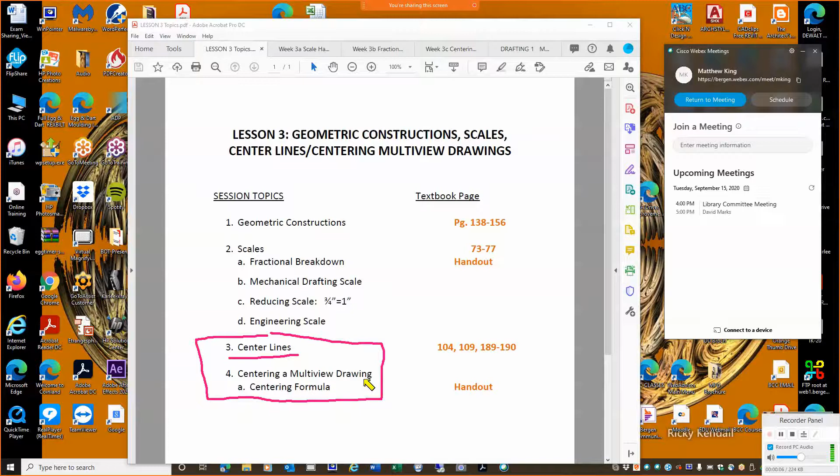Okay, so let's pick it up by going back to the drawing board. I have this drawing, a new drawing that I put here, and I want you to create the same thing. I simply started out with a rectangle of any size, and then I projected this upwards, and I drew a circle, and then I drew a box around it.

Okay, so it doesn't have to be of any size or exactly like this, just get it as close as you can. I would pause the recording until you get that done, and then resume. Okay, so I'm gonna pick it up, assuming that you've done that, and we'll move forward from there. All right, so center lines.

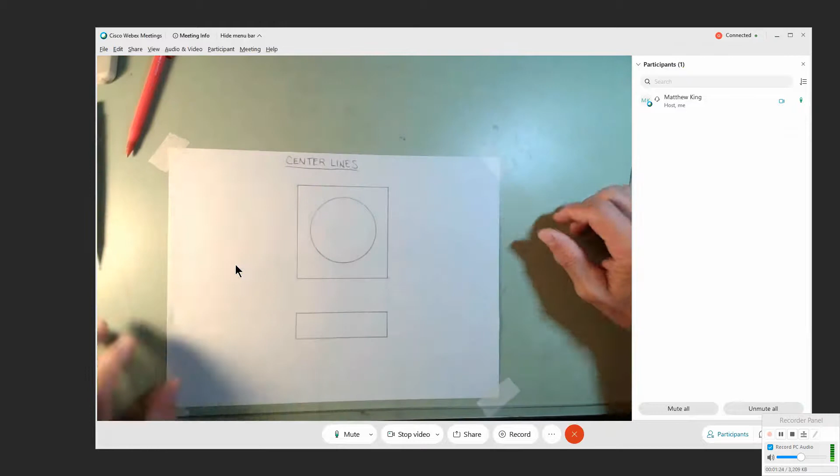Center lines have some theory that we have to talk about first. I'm going to go to page 109 in the book, and last week we saw this area for hidden lines, and now we're talking about center lines. So there's a couple of paragraphs that I want you to read, pointing out information in figure 4-28, which is down at the bottom here.

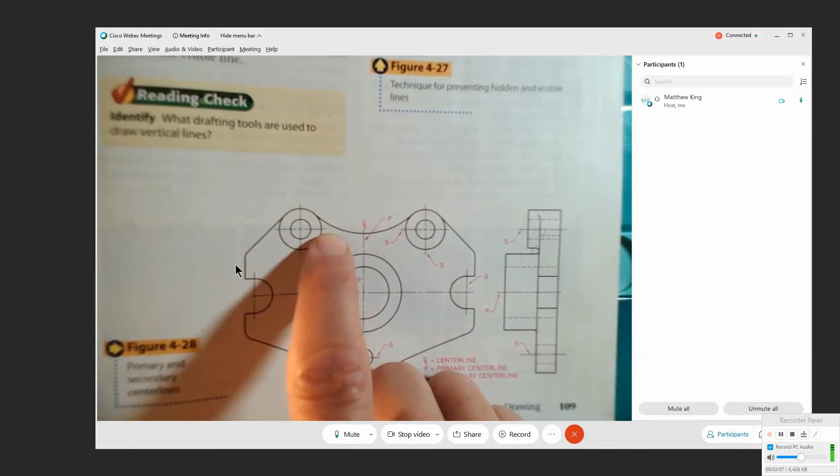So taking just a quick glance here, you've got a center line that looks like this as you're looking through the hole. Notice there's that little inner cross followed by a gap, and then the line goes out and goes past the edge of the circle. That's going to happen in all cases. So you have the center line that looks like that when you're looking through the hole or the opening, and then you have a center line when you're looking at it from a side view.

And if you look carefully, that's kind of just the horizontal piece of this, right? Long, short, long, long, short, long. They officially refer to that as primary center lines and secondary center lines, but that's not something I need you to get too crazy with. What is important is every view that involves a circle must now have center lines, and you need to draw them in there. So that's what we have to learn.

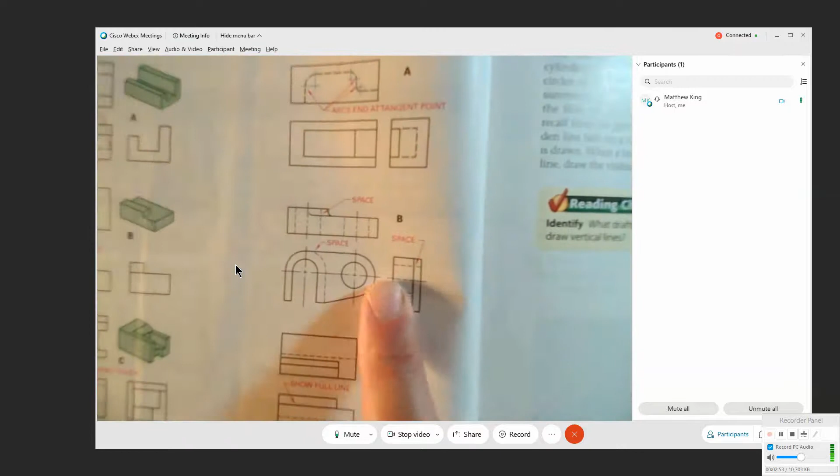If I take you to this example here on the previous page, you can see the front view, you have half a circle here, so that requires a center line. You've got a hole there and an outer arc, so these center lines have to go out past that. In the top view, it shows as the hole going up and down here. In the right side view, the hole goes that way. So they call that the axis direction of the hole. The hole is going through in that direction, so that's where you have only the horizontal one.

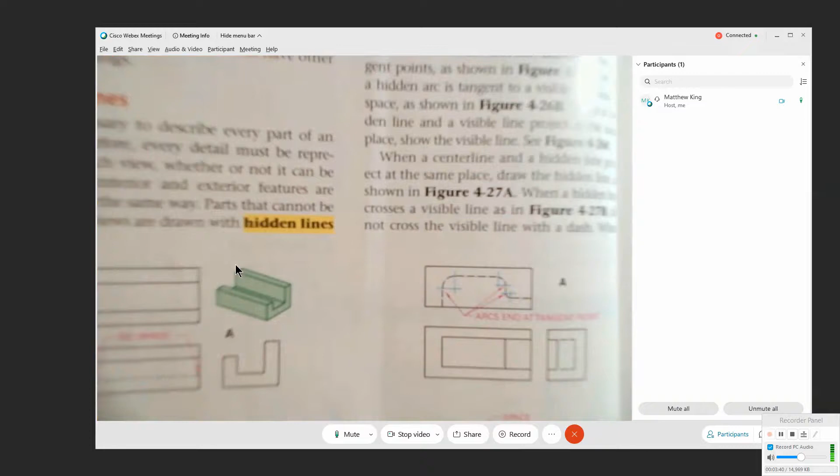In the top view, the hole is going through the part in that direction, so that's why you have the center line that way. Different shapes will require the same strategy of center lines. All right, so we got this here. I'm going to start by drawing the center line in the front view. Well, let me rephrase it. I'm going to draw the center line in the view that it shows as a hole.

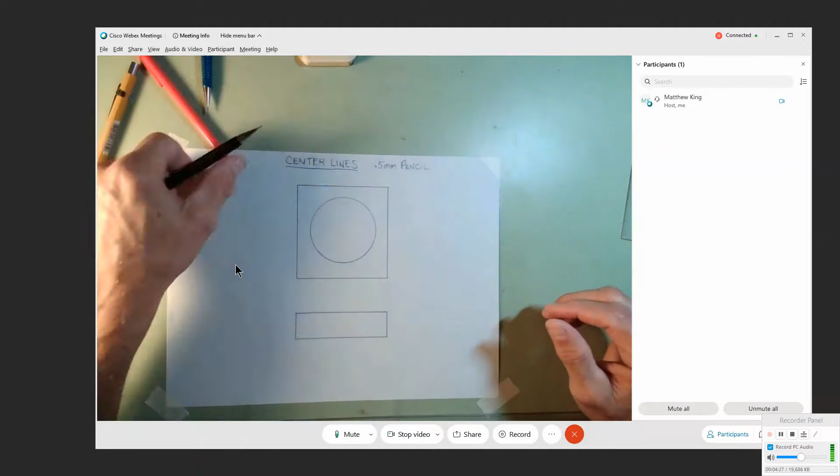Before we do that, we need to know that when you draw center lines, that's using your 0.7 millimeter pencil. I am wrong on that. 0.5 millimeter pencil. 0.7 is for hidden lines, forgive me. So 0.5 millimeter pencil. Now center lines are just symbols. They're not actually physically part of the object. Because it's a symbol, it's got to be thinner. And this is where your line weights really have to start showing. So your object lines must look darker and heavier than your center line.

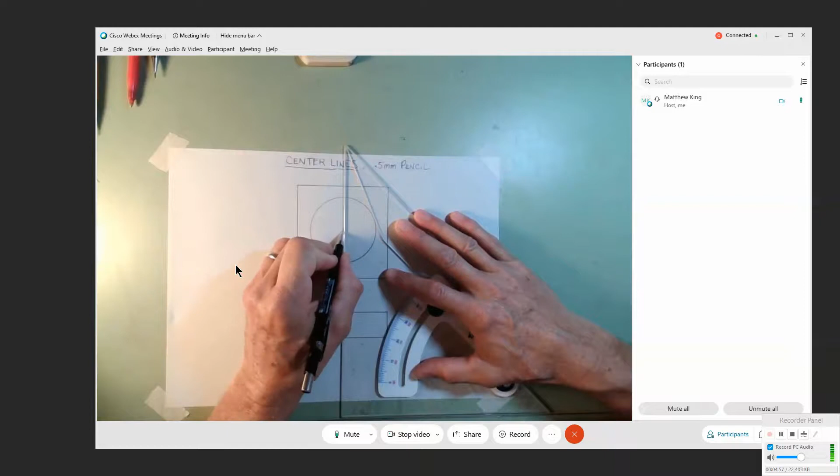Now, I'm going to draw it in this top view here, looking down through the hole, and I want you to just watch me, and then I'll dissect it when I'm done. So remember, we have that inner cross at the center. And you'll know where the center is because that's where your compass mark is. So it's like going over a pothole when you draw that. You dip down into that little compass hole that you'll feel with your pencil.

So you want that nice balanced cross at the middle here. And now we leave a gap and we draw out past the edge of the circle in all directions. And I'll back up and tell you what all of that amount is here.

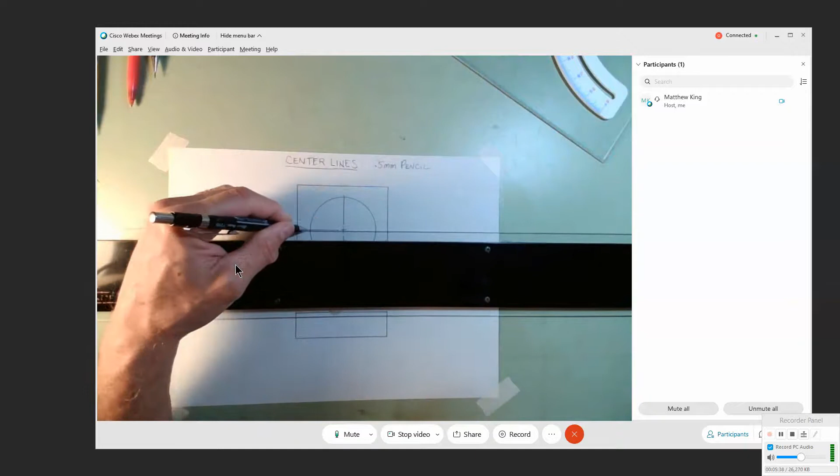Got a little close on this one on the left, so I'm going to clean that up because I want to do this just right. There we go. All right, so I'm going to draw these rules in red pen, so that you have this standing out here.

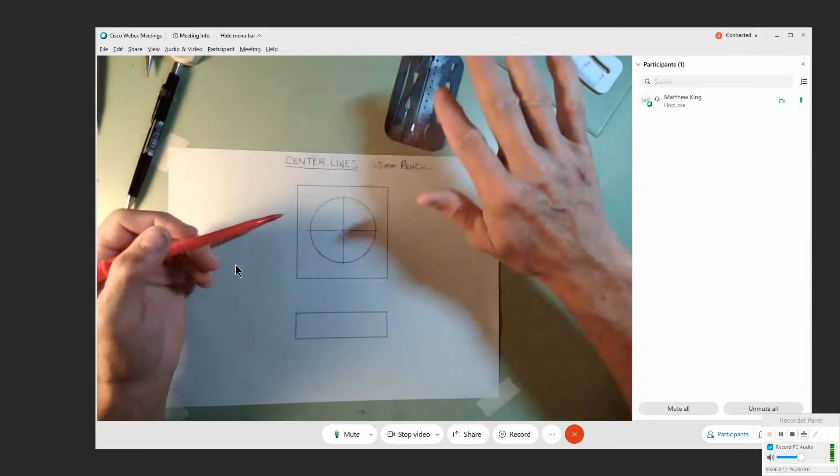So this inner cross of the center mark, that is 1/8 of an inch. Right, so that should sound familiar. 1/8 of an inch is what we draw with our dashes on a hidden line. The space, the gap, after that is 1/16 of an inch. So just like the hidden line, you got 1/8 inch dashes and 1/16 inch gaps.

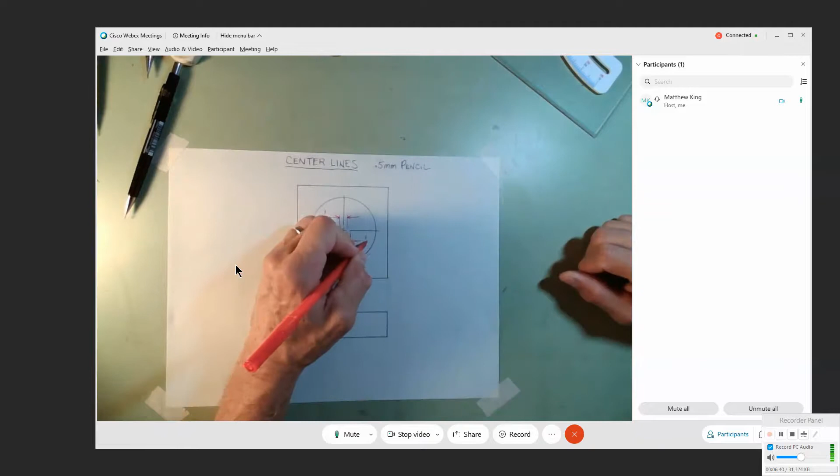Unlike a hidden line, remember with hidden lines you have that little plus or minus symbol to say it can vary based on the conditions. There is no plus or minus here. That inner cross has to be exactly 1/8 at all times, and the gap exactly 1/16.

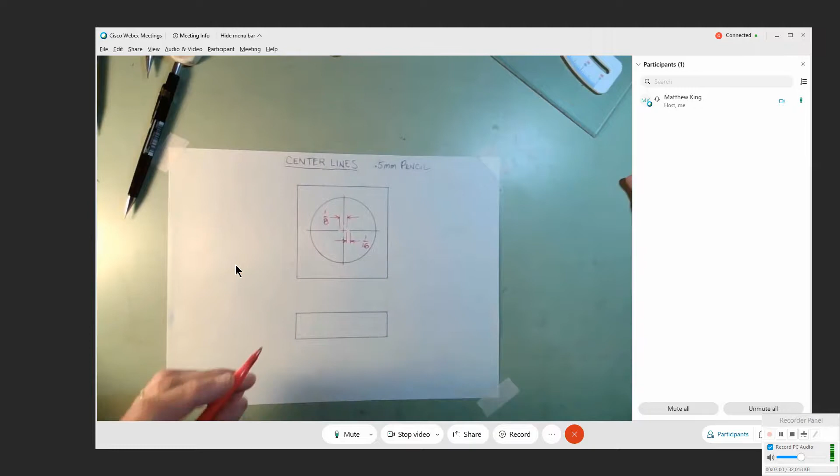Then we go out and we draw past the edge of the circle by 1/16 of an inch. And that too is an always, always. Okay, so in all conditions, on all sides of the circle, you are drawing out past it by 1/16 of an inch.

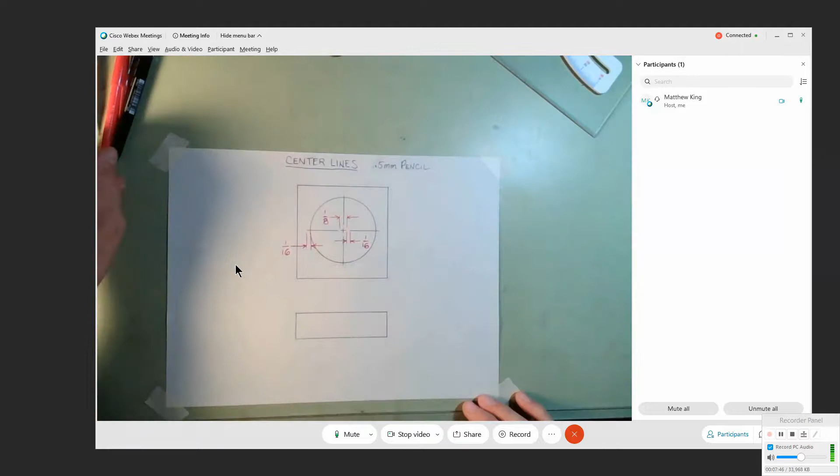So anytime you're looking down into the hole and you're seeing the circle of the compass, your center mark must look like that. Now in the front view, I haven't even drawn the hole yet, and I wanted you to see how I do that. So that's going to show as hidden lines, and that's where I'm thinking 0.7.

So I have to line up with my straight edge the outer edge of the hole, the 3 o'clock tangency, right? And I project down lightly, and then I draw my hidden line in my front view from top to bottom. And I repeat that on the left side. I line up my 9 o'clock spot, I project down, and then I draw my hidden line from top all the way to the bottom. Remember, you don't start or finish with a gap, that 16th inch gap.

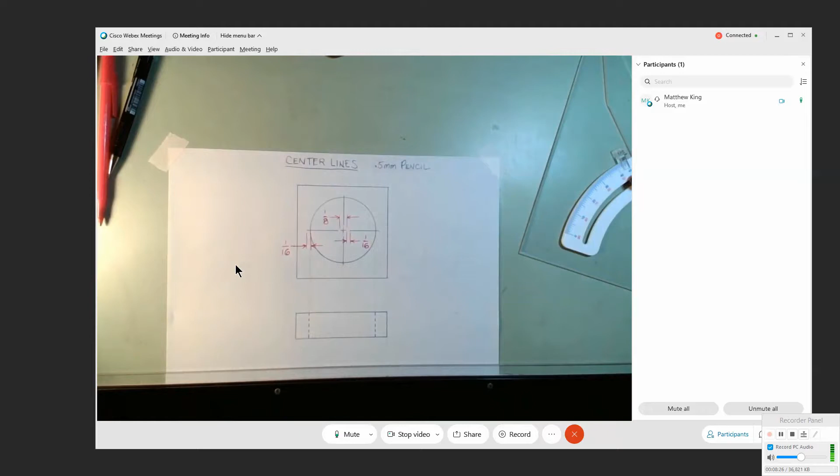Let me bring this down a little closer. Okay, so you can see where I've constructed my light lines to find exactly where this starts, and then I draw down to where it finishes. And that way I'm assured that my hole in the front view lines up exactly with the hole in the top view. Now I have to draw my center line, which is as if I'm taking this and just transferring it down, right? The axis of the center is up and down.

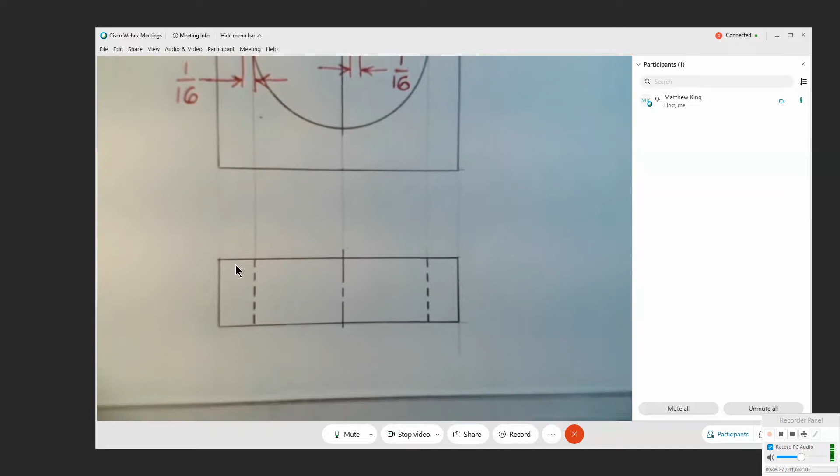So I'm going to project off my center line in the top view, and I have to draw this 1/16 above before I put the dash right in the middle, and then I go down past it by 1/16 below it. Okay, so there is my center line in the front view. Now, just going to emphasize the one rule that's always in action here, is that you're going out past the edges by 1/16, right? So let's write that up, 1/16 inch past edges.

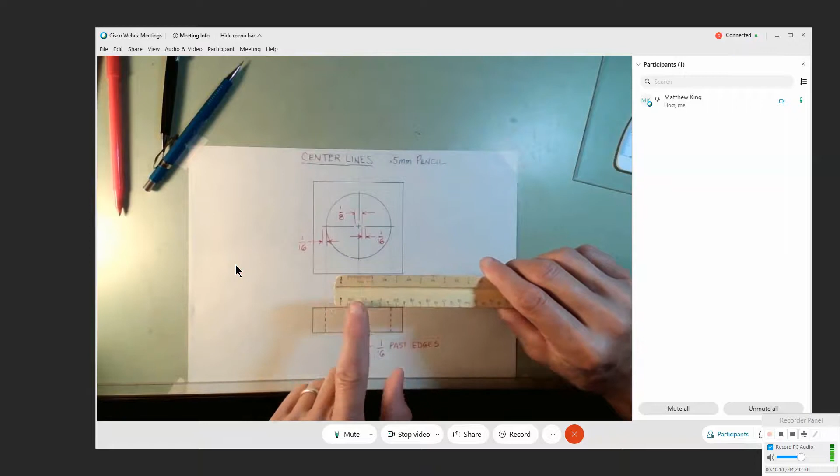Now, here's a little curveball I'm going to throw at you. On the first recording, we learned about scaling, and we spent a good amount of time on 3/4 scale. You do not draw all of these little spacing rules ever at any other scale but full scale or 1-to-1 scale. So even though the drawing around it is being reduced or enlarged, hidden lines should always be 1/8 inch dash with 1/16 space. Center lines should always have that full scale 1/8 inch cross in the middle and a 1/16 inch space, and then draw out past it.

Okay, so line styles are not scaled. That's a good thing, believe me, because drawing a small line even smaller at a small scale is not easy. So we like that rule. You do not scale line styles.

Okay, now, I just got done with all this, and now I have to tell you that there are 2 exceptions to this rule, and they'll make sense once you see it. One is the exception of small, one is the exception of large. So let's talk about the small first.

If I have a really small circle, and I'm just freehanding a small circle, and then I go to draw the center mark on here, and I draw an 1/8 inch cross, which almost fills the circle, and then I got to leave a 1/16 inch gap and then draw past it by a 1/16. That's just not going to work. It's not enough room in there.

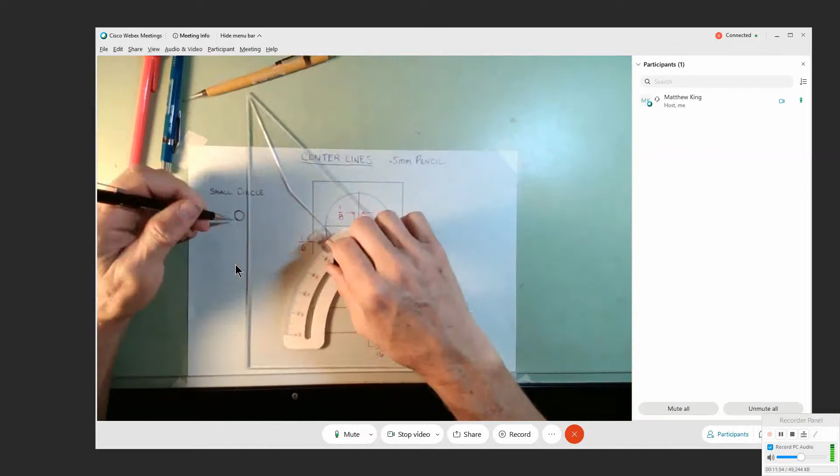So you'll know the second it happens, and when that happens, we don't follow any of these rules. The only rule we follow is the 16th. You'll just draw right through the circle, past it a 16th in both directions, and there will not be that little inner cross with a gap.

Okay, so that's what your center mark will look like in small circles. And once again, 1/16. So that rule, there is no exception. Let's talk about the exception for large holes. And not necessarily the diameter, but the depth of it. What if this thickness was way deeper? Okay, so I'm going to just quickly sketch an example of that.

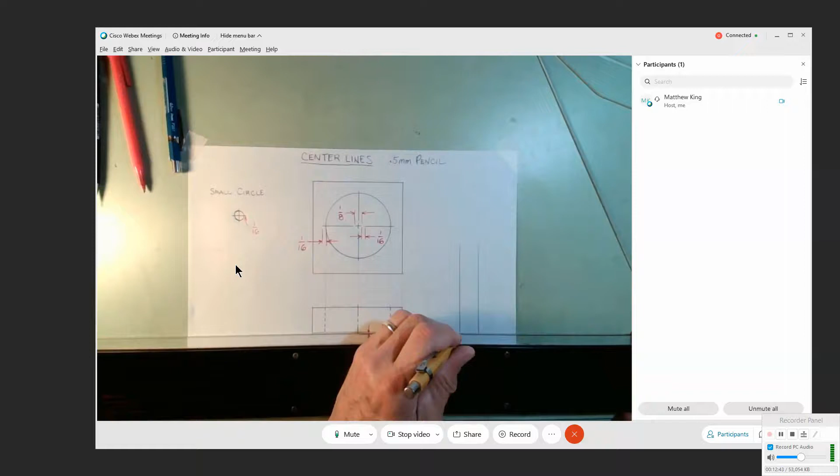Okay, let's say once again, this is the front view and the top view. And I have a hole in here. I'll just freehand it for the sake of time. Let's say this is big enough for me to put my center marks in there. And then this hole goes all the way through.

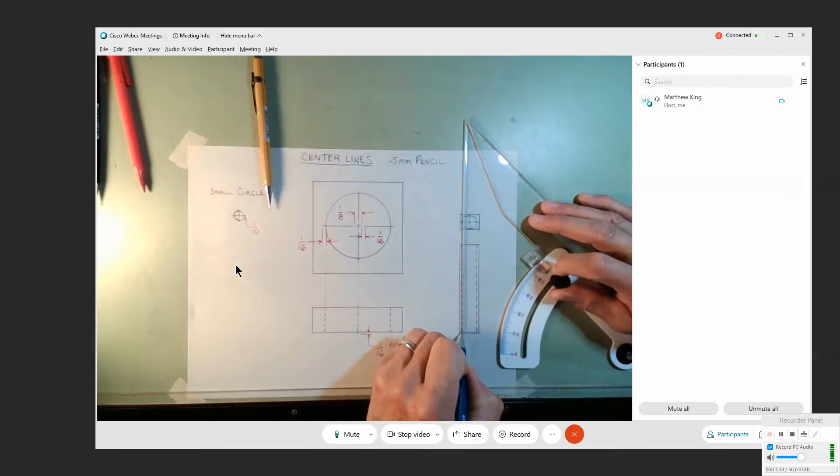And now I have to draw my center line. Okay, so something's got to change here. So what I'm going to do is I need to repeat this pattern that I see here for a rule that I'm going to give you in a second here. So I'm going to have long, short, and then I just repeat that pattern all the way through.

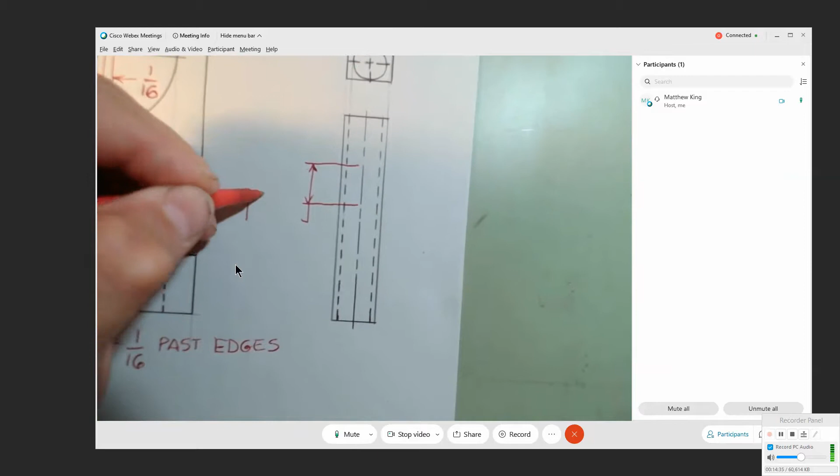And that is because the longer part of this center line, the rule here is this cannot exceed 1 1/2 inches, the length of that. 1 1/2 max. So if that has to be more than 1 1/2, then you repeat the pattern, and that keeps that rule. It can be less than that, it can't be more than that.

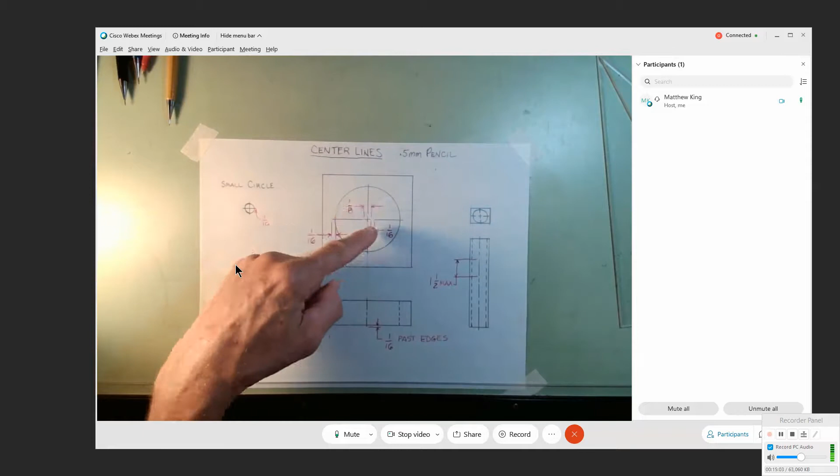All right, so that is the rules for center lines. There's not a whole lot, right? It's a straightforward thing. You just have to learn how to draw the face of the circle and the side view. And 1/8 inch, 1/16 inch are the magic numbers, and then this longer one, 1.5 max. You just repeat the pattern. So forevermore now, anything that's round, I'm going to be expecting center lines in all views that represent that circle.

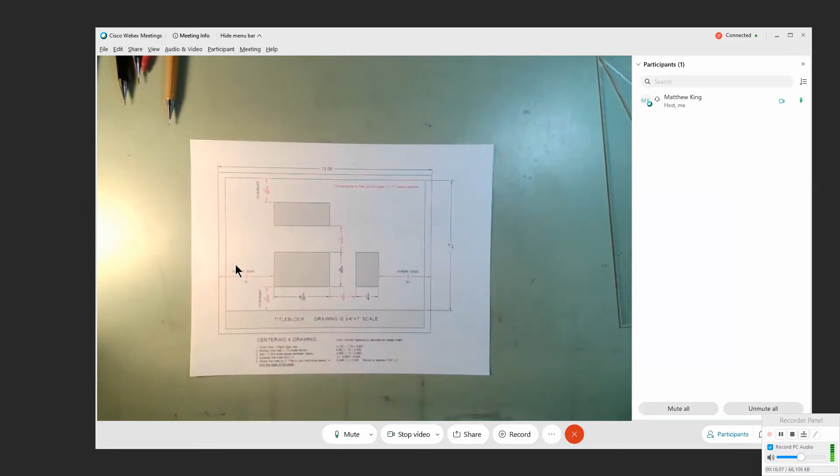Okay, that leads us to our last topic, speaking of centering, is now we have to be able to center our 3 views on the drawing. So I need to fill us in on how that's done. Now, there is a handout, which probably looks kind of scary when you downloaded it and printed it out and said, oh my God, what is that? This historically is not the funnest part of drafting, but it's a necessary part. We have to go through this now before our pencil can even hit the paper.

And to give you a sense of understanding, if I'm creating a drawing like we did last week, let me get the blank sheet of paper. Last week, regardless of what sheet you have, whether it's this paper or the makeshift title block, I simply said go 1 inch over and 1 inch up, and that becomes the lower left corner of your big L-shaped line. Okay? We can no longer do that.

We have to calculate where that point is going to be so that when we lay out the width, the space, and the depth of our front view, the space outside of the views, both horizontally and the space above and below, are equal. So our drawing is balanced. Okay? And that's what this sheet is trying to communicate. All right. So if we look at here, the first things we have to know, and I'm going to circle them, are these red values.

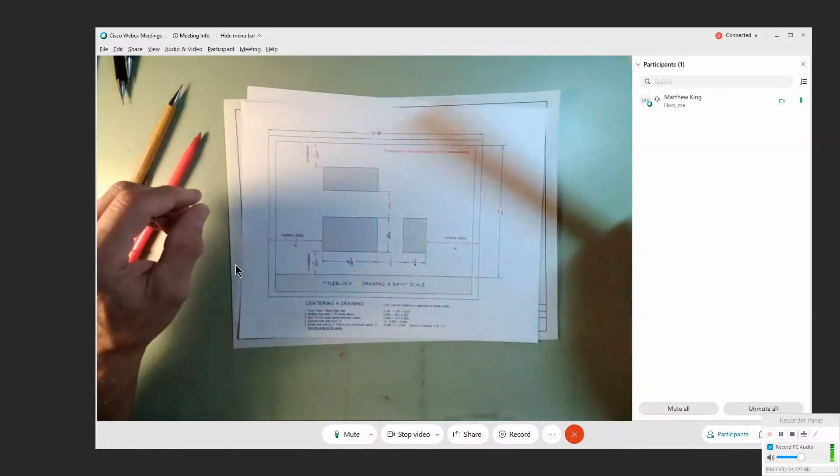All of the red values are always measured with your full scale, your 16th scale, because they represent spaces: the space above your object, the space below, the space to the left, the space to the right, and the space in between, which we learned last week forevermore is 1.5 inches. Okay? So you always measure those at full scale. It's only what's shaded that is going to be reduced to 3/4 size. Now that's going to seem kind of crazy, right? And I'll show you what happens.

So this is saying the paper's edge. This outer box represents your 9 by 12 paper or your 8.5 by 11. So when you're measuring something horizontally, you are literally measuring it in from the outer border of the paper. Why? Because this is 12 inches. That's a nice number to work with. If I measure from border to border, I've got 11 and change, and I don't want to deal with that.

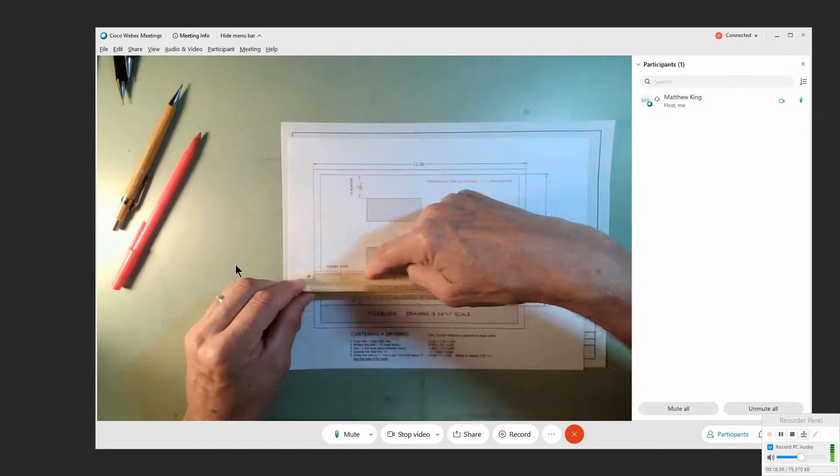I want nice, even numbers. So to make everything work, I just have to know that I measure from the outer edge. All right? So here's what happens. When you measure this thing, you start with the 16th, and you would measure 3 inches. Then you have to flip to the 3/4 size, and you would measure 4 3/16 inches. Then you go back to the full scale inches, and you measure 1.5, and then you go back to 3/4 size, and you measure that.

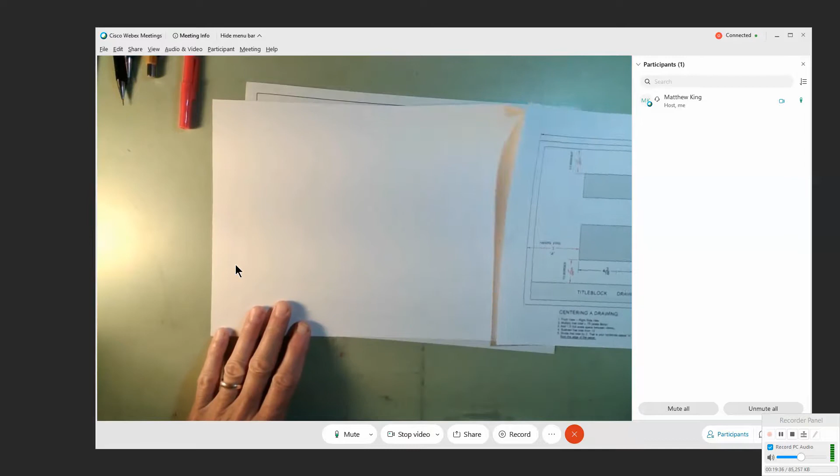And the same thing up and down, right? Full scale for the space, 3/4 size for the height of your front view, full scale for the 1.5 space, 3/4 size for the depth of your top view. Okay, so that seems kind of crazy, but that's what we do. All right, so what I want to do is kind of interpret what's happening on here. And it's going to seem crazy first time, second time through, but like I said in some other things, it'll just be second nature.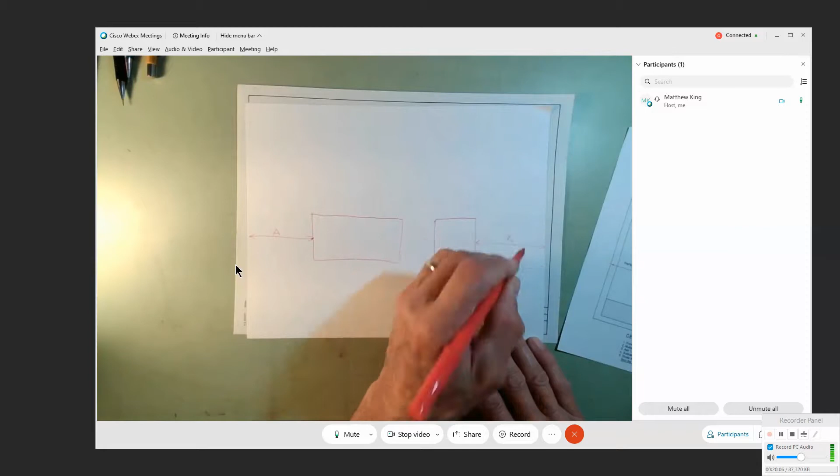All right, so here's what we have to do. I want to show you in a simplistic way how you're centering this. And I just want you to watch me. Don't take notes, just watch me, right? So here's what's going to happen. I'll eventually have my front view, a space, and my side view. And my objective is to get this, which we'll call A, equal to this, which is also A. A and A must be equal. And what do I know?

I know that my paper is 12 inches and that my space between it is 1.5. Okay? So I refer to those as constants. You're always going to have 1.5 between. Your paper's always going to be 12. Right? Now I have to say, those of you without the paper, it's 11. Right? So you have 8.5 by 11. So please understand and keep that in mind here.

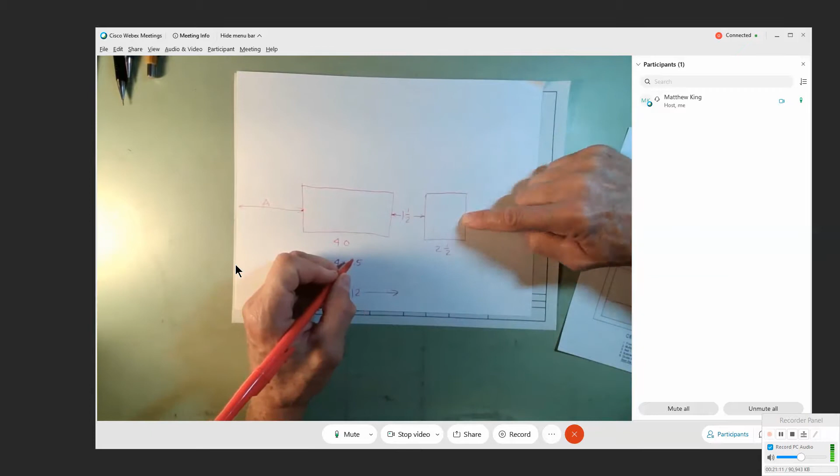So I'm just going to throw some real simple numbers on here. Let's say that this is 4 inches and that this is 2.5 inches. Okay? So let's just say that that's the measurement of the width of my front view, the depth of my right side view. So in order for me to come up with what A should be, I'm going to take 4 and I'm going to add the space between it, which is 1.5, and then the depth of my right side view, which will be 2.5. So the sum of those three things, 4, 5.5, 6, 7.5, and another half is 8. So the sum of all of that equals 8 inches.

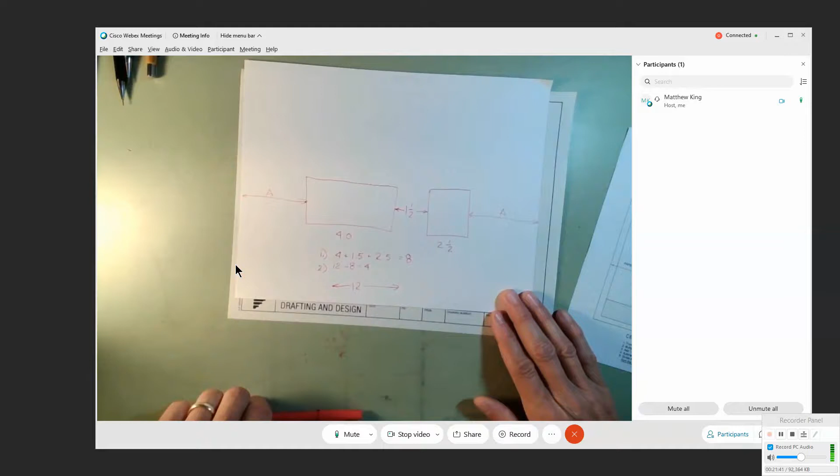Okay? That would be step 1. Then step 2, I would say 12 minus 8 equals 4. Now that's how much space is totally left over. If I took the distance from here and I shoved it over to the left, I'd have 4 inches left over. I need to divide that in half to get equal spacing. So step 3 would be 4 divided by 2 equals 2. That's my horizontal outside spacing of A. So A equals 2. Right?

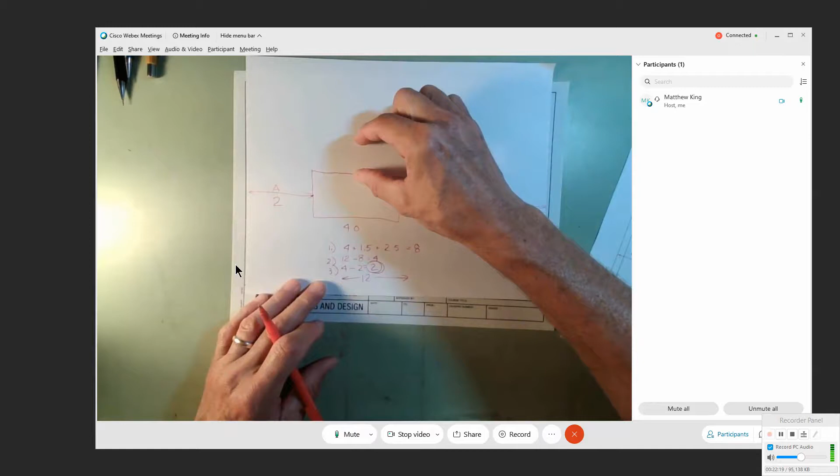So if I measured in from the paper's edge 2, and I drew 4, and then 1.5, and then 2.5, I'll have 2 left over. That is basically what we're doing. And then we do the same thing up and down. I add the height of this, plus the 1.5 between, plus the depth of my top, and I have to add all that up and subtract it, not from 12, but from my border to border. I'm going to come back to that. Just trying to reason through what's happening.

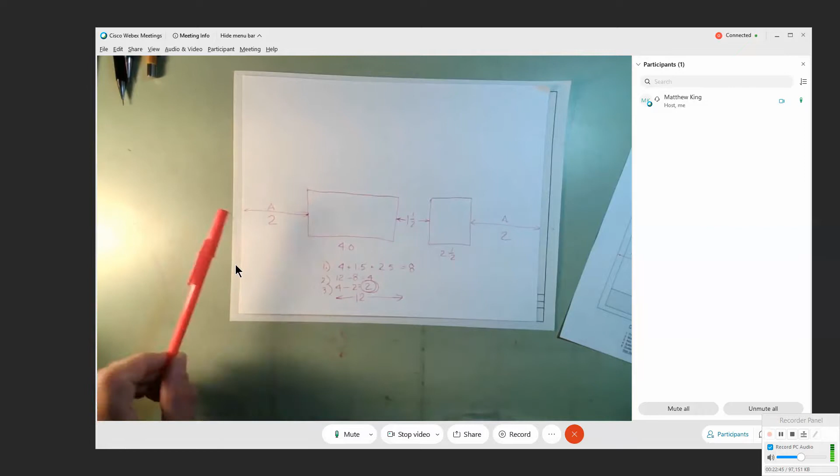Now, this is basically what we're doing, but not exactly. It's not realistic. Why? There's 2 things that I have to add to this process. One is I've added all this up as if I'm drawing at 1-to-1 scale, and we're not drawing 1-to-1 scale. Remember, the shaded boxes are what's at 3/4 size. So I have to do something to account for that. Okay? So that's going to be another step in the process here.

Then, we're not going to have simple, easy numbers like 4 and 1.5. Life should be so good, right? We're going to have mixed fractions, 4 3/16 plus 1 3/4. All right? So now, if we're not great mathematicians, we've just gotten a headache. All right? So keep the bottle of Tylenol in hand, but I'm going to show you how we'll get through this.

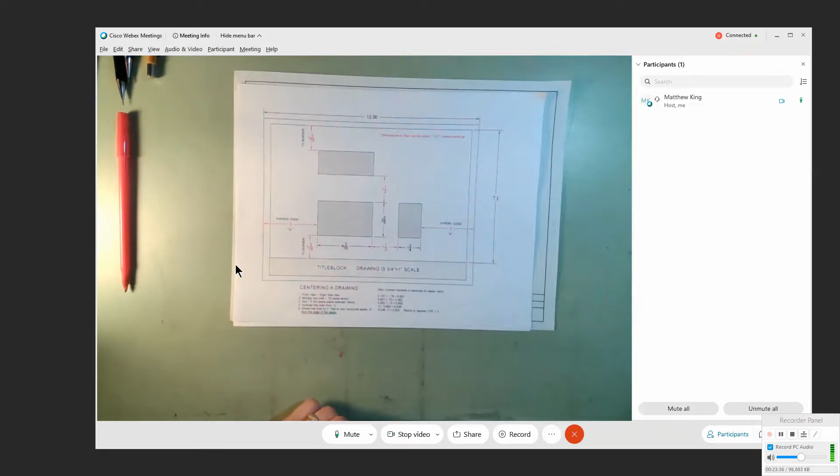Right? Now, in the course material that hopefully you downloaded, you also see this thing, a fraction to decimal and decimal to fraction conversion chart. This also has millimeters. You know, we're not doing that. So really, we're just interested in these, the circles with the numbers. So we're going to involve this.

Now, let me interpret what's happening here. Okay, and we'll use the same exact numbers that you have on the handout, which, by the way, is broken down step by step underneath it. But I'm gonna go back through that to make sense of it. Okay, so I'm gonna put this paper up here and a blank sheet below it so that we can see. So here's what we have going on here.

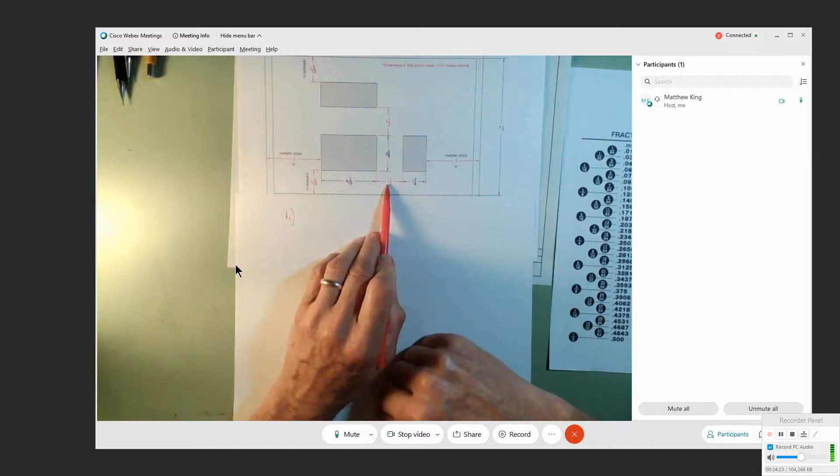Step 1. I'm going to ignore my spacing of 1.5. I'm simply going to add my front view plus my right side view, but I'm not going to keep these as fractions. I'm going to convert them to decimal. Okay? So, it's 4 and 3/16. So I find 3/16 in the little bubble, and I look to the right, and it's actually 4.187. I'm not even going to go 4 decimal places. We're not splitting atoms here. So 4.187, good enough.

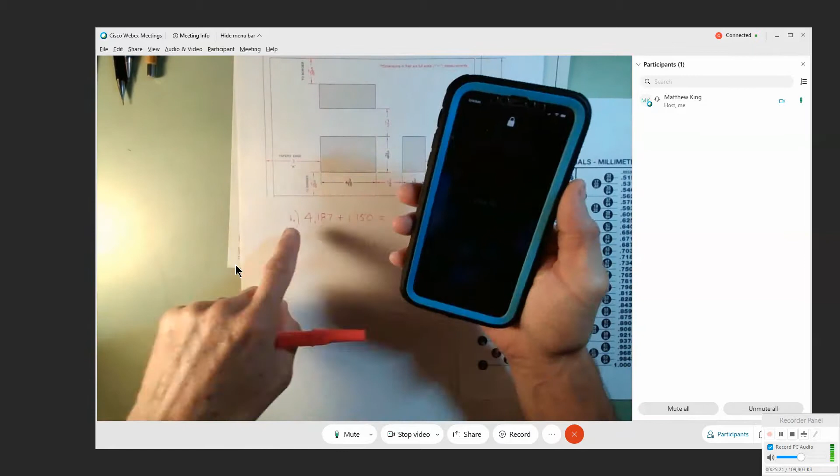Plus 1 3/4. So I've got to find 3/4 here. That's .750. Plus 1.750 equals. Right? Now, have a calculator on hand, even though you could probably do that in your head, but we're going to keep stringing this here. Get to my calculator. So we've got 4.187 plus 1.75 equals. So our answer is 5.937.

Step 2. Now, I have to account for my scale of my drawing on this. So this is in addition to what I went over a minute ago. So now I have to say 5.937 times 0.750. That's the scale. So we're actually going to get a reduced number, what it's really going to measure on the 3/4 size scale. So now I multiply that 5.937 times 0.75 equals, and here's the reduced number, 4.452. Right? I'm not going to go all the way out to 4 decimal places.

Okay? Now, step 3, I want to go back and add my full scale 1.5 inch space. So 4.452 plus 1.5. So I go back and say plus 1.5 equals. And then I get another crazy number, 5.952. So now I'm back to the point where I know what it measures from here to here. Right? I call that my working space.

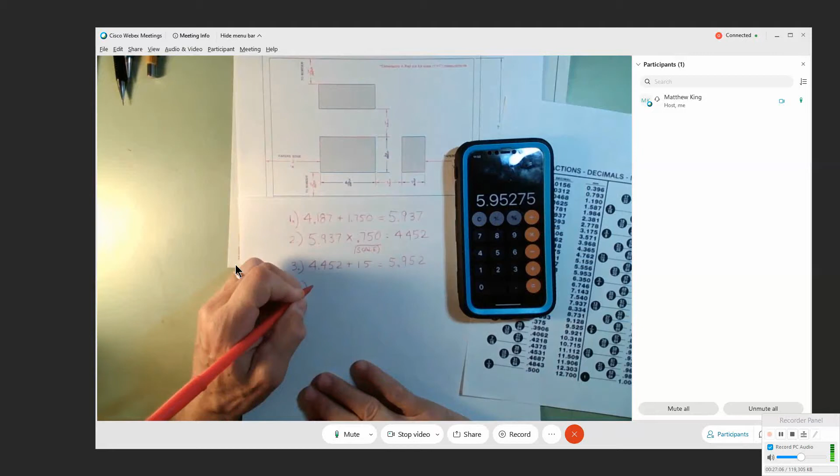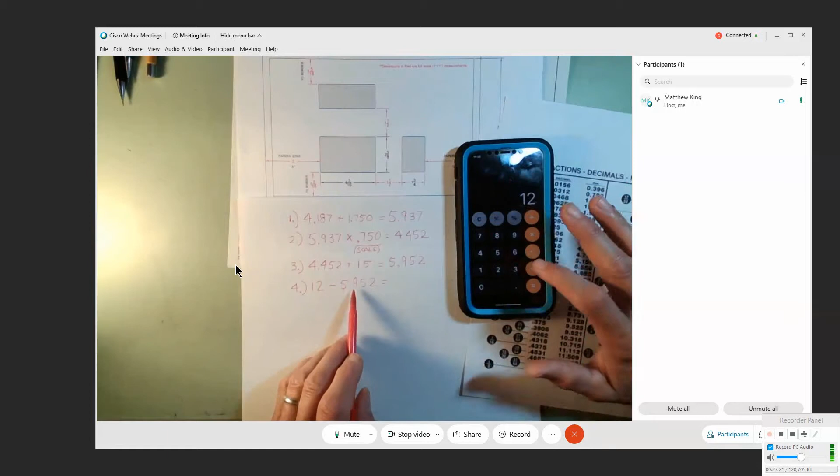Now, step 4, I say 12 inches minus 5.952 equals. So I'm going to clear this. I'm going to say 12 minus 5.952 equals 6.048. Finally, I need to divide that by 2 to get my equal spacing, A and A. So 6.048 divided by 2 equals 3.024.

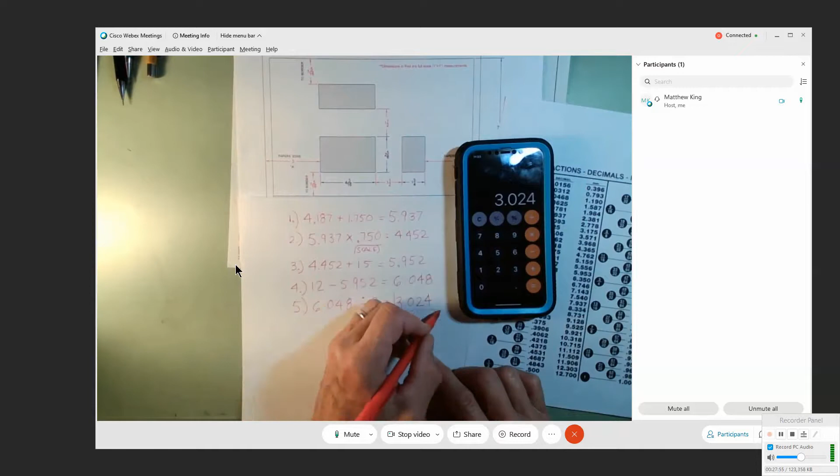Now, 3 and then .024. So I'm thinking, what's with that? So if I try to find .024 here, that's somewhere between 1/64th and 1/32nd, which is not even on my radar. So ignore the .024. So that is 3. All right, we'll call that dimension A. And that's what we're looking for. A equals 3 inches.

So now I would take my full scale measurement and I go from the literal edge of the paper on my drafting paper, right? And I measure in from the left edge of the paper with 0 on there, and I come in 3 inches, and I would do that right on the top of the title block line so I have something to measure to. And I would put a little notch on it. Okay? Then we have to go back through it again for the up and down.

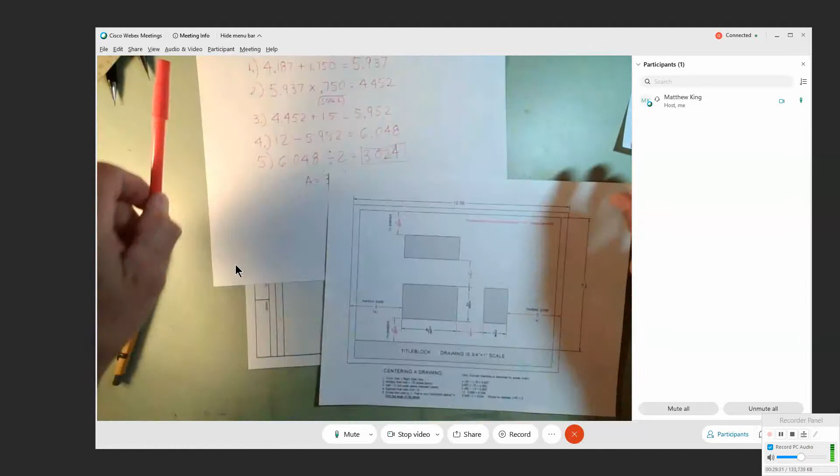Now this says 7 1/4, and that's because I've got between border to border, and I'm even rounding that off. It's a tiny bit more than 7 1/4, but it's a much nicer number. And remember, you're subtracting, you're dividing by 2, so you're going to wind up with a hair difference, and that's okay by me. I'm trying to make it as easy as I can here. So what we need to do for up and down is the same thing. So the height of this is 2 5/8. That's 2.625. And the depth, which is the depth of the up and down here, I'm going to do that in black. So this 1 3/4 is the same up and down.

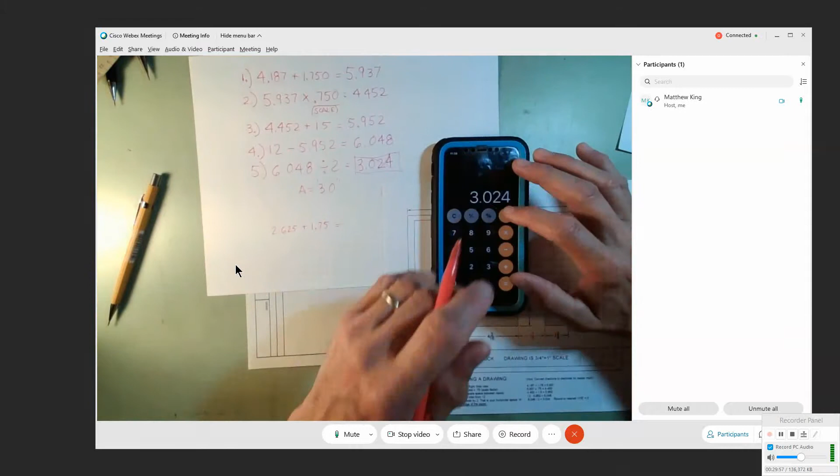So I've got 2.625 plus 1.75 equals. All right, so here we go again with the calculator. So 2.625 plus 1.75 equals 4.375. That's step 1. Step 2, I need to then take 4.375 and multiply that by 0.75 because that's my scale factor. And then I come out with a crazy number, 3.281. Good enough.

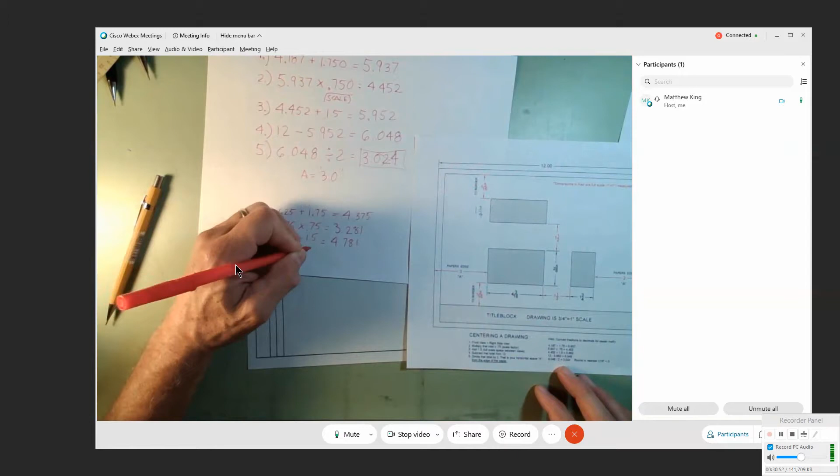Step 3, right? I now add my 1.5 inches, 3.281 plus 1.5 equals. And I've got 4.781. Step 4. It's not going to be 12, it's 7 1/4, right? 7 1/4. 7.25 minus 4.781. Okay? So 7.25 minus 4.781 equals, and that's 2.469. And then the last step is 2.469 divided by 2 equals.

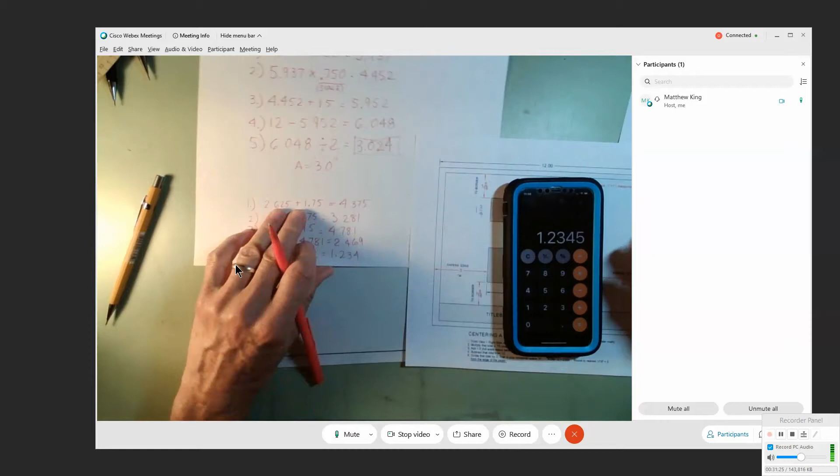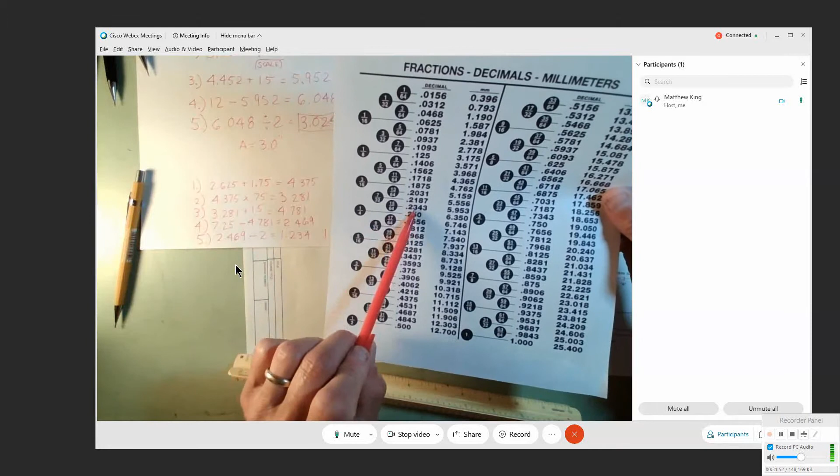1.234. So now we got to get that back to a fraction so we can lay that out on here. So it's 1, and now I got to find out what 0.234 is here. So 234, here it is right here, which is nasty: 15/64. And I'm going to round that to the nearest measurable thing. I'm close to 1/4, right? That's a really tiny amount. So let's say 1 1/4 is what our up and down measurement's going to be.

Now, this is actually a little bit wrong here. This says 1 5/16. That should actually be 1 1/4, which is 4/16. I think that was left over because our older paper we had 7 1/2, which, when you do the math, made that a little bit bigger. I never corrected that. So 1 1/4. All right.

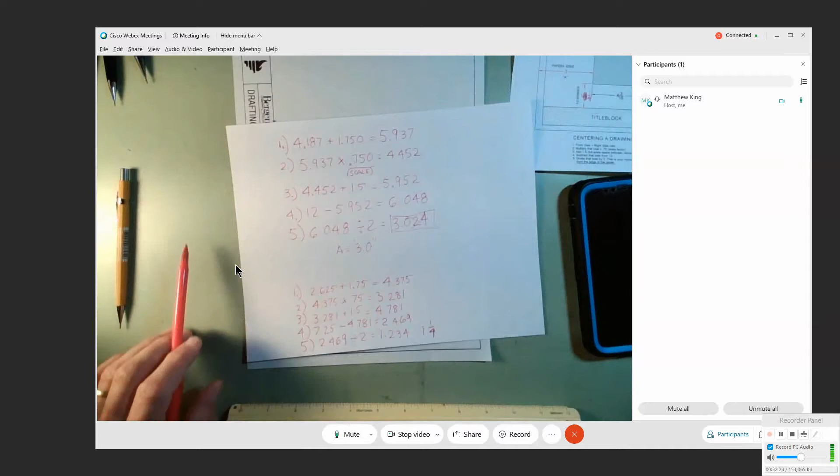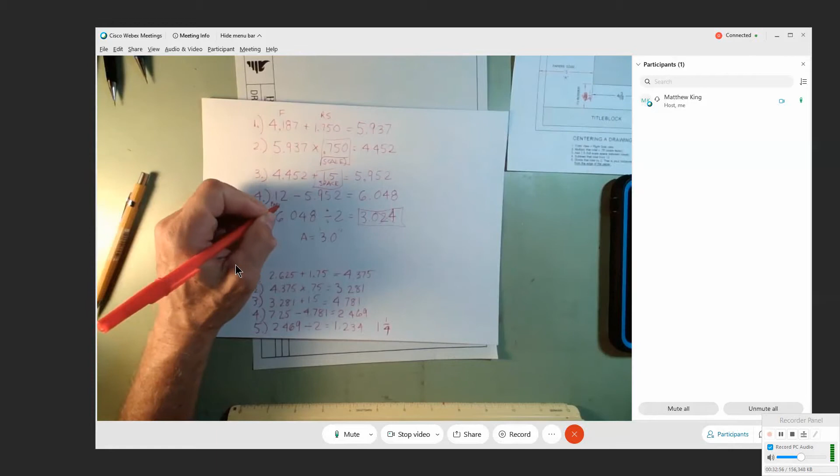I know this gets busy looking at this paper, but remember, you can use a calculator. I just wrote it all out to hopefully make it easy for you. So if you interpret some of this, it's front plus right side, right? And then multiply that by the scale. And then this 1 1/2 is the space between views. And then this is the paper width, right, the 12. Okay, so we're going to have to incorporate this now.

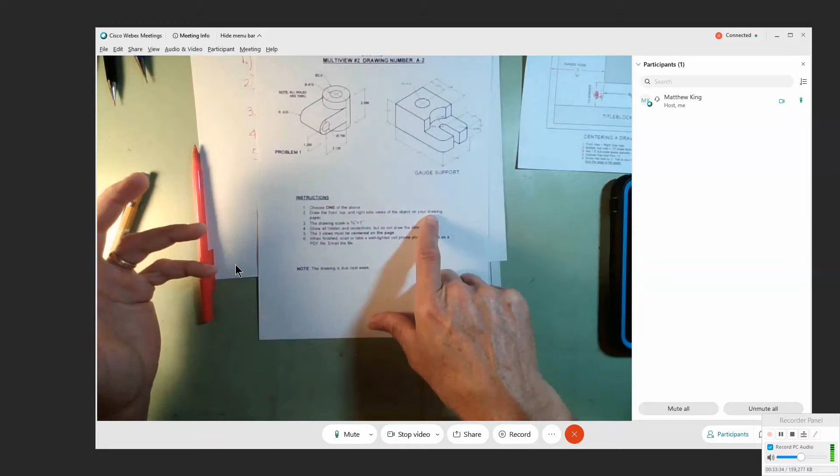So finally, wrapping this up, we now have to worry about an assignment. So here is the assignment. Let's read through the assignment first, and then I'll give you some hints and tips. Choose one of the above, right? You have problem 1 or gauge support. 2, draw the front, top, and right side views. So more the same as last week, right? So this is the second time through that. So we have to basically think of these things as 3 rectangles, no matter what it is. If you're intimidated by looking at that, we start out with 3 rectangles and worry about the details after.

Okay? The drawing scale. So this is new. It's 3/4 inch equals an inch. That's just 3/4 size. Show all hidden and center lines. So now we have to worry about center lines, because there's things that are round. Show all hidden and center lines, but do not draw the dimensions. That's all these numbers. We have to draw to those numbers, we're just not drawing those numbers. The 3 views must be centered on the page.

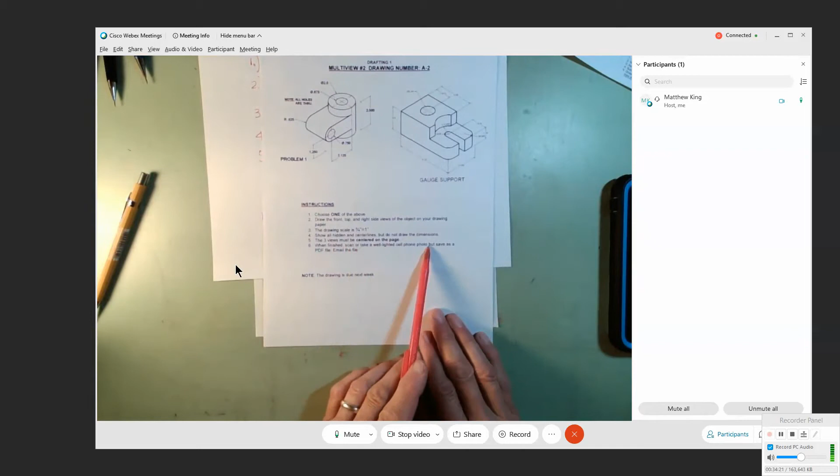When finished, scan it if you have one of those printers that you can scan, or take a well-lighted cell phone photo. If your room is at all dark, turn your flash on. A couple of you were sending me drawings, and it's like, are you doing this in the dark? All right. So get it well lit. Go outside or go in the kitchen somewhere to make sure that it's bright, because I can't see your construction lines clearly if the drawing is dark. All right, so scan it or take a well-lighted cell photo and save as a PDF and email me that file.

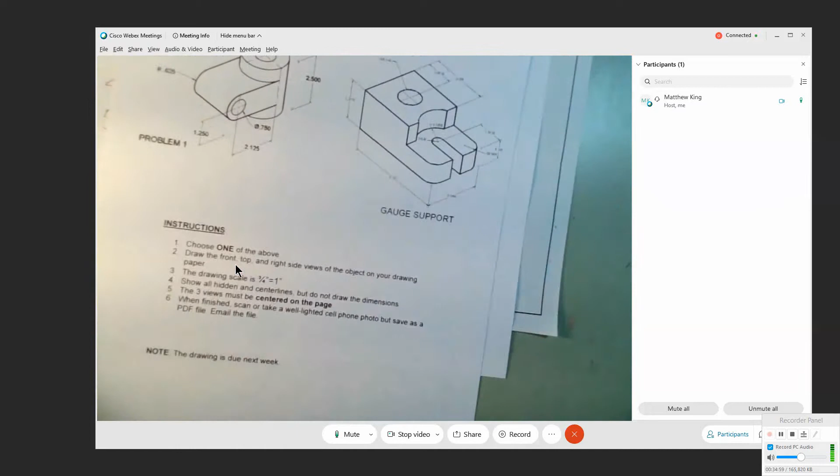All right, so let me help you out on a couple of these things here. First thing you have to do is find the overall height, width, and depth. On the gauge support, that's straightforward. We have 5.5. We have 2 9/16. That's a little tough to see, it's a little light, but 2 9/16, and 3 1/16. So we have our three measurements right there. This one, we have to do a little calculating to figure that out. Now the height is right there, 2.5.

The depth of this is really disguised as the diameter of this, right? So this is the depth. It's 2 inches all the way around the circle. So from side to side, it's 2 inches. This is the height. It's the width that we have to calculate. The width is disguised a little bit. It's 2.125 plus half of this plus this amount, the radius of 0.625. So 0.625 is from the center line out to the outer edge of this.

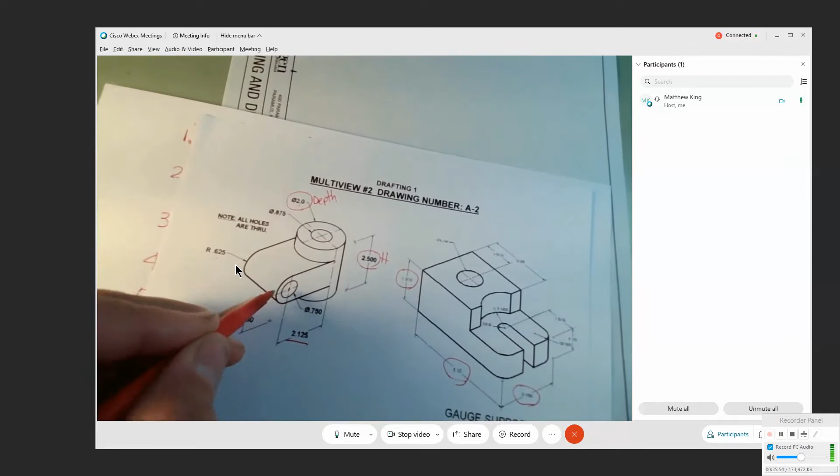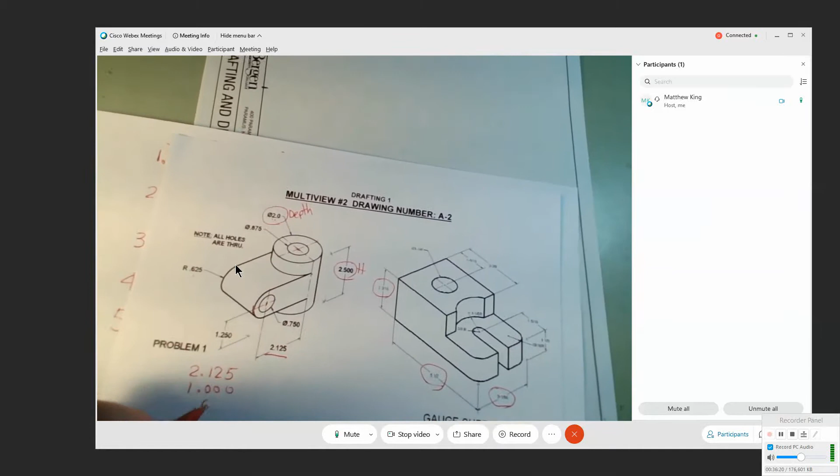So if we write that down, we've got 2.125 plus 1.000, right? Half of 2 is 1. From here out to here, right? So that's the center, and it's another inch outward, or the radius of that, plus 0.625. So if I add all that up, right, 4, 5, 7, 3.750. So 3 3/4 inches is the width of that.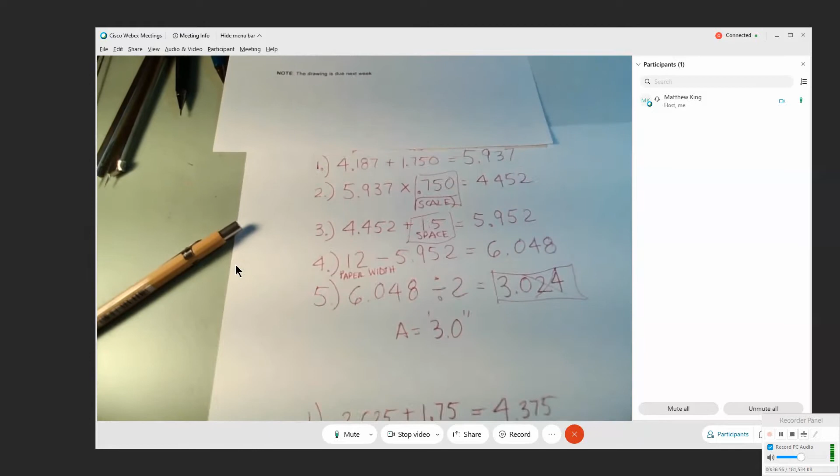So now I know what my 3 rectangles should be, and I have the information that I need to center it. Okay? So I will do the centering on each one of these to find out what A is for you. And then it's up to you to find out what up and down is going to be. Running out of blank sheets of paper here. Okay, I'm going to do that on the back side of this. Okay, so let me hook this back up.

So for problem 1, the numbers we're looking for are 3.750, which is the width, plus the depth, which is 2. All right, so you've got 5.750. All right, that's step 1. And this is W plus D. Then step 2, we have to take 5.750 and multiply it by 0.75. Now back to the calculator.

Okay, so we've got 5.750 times 0.75 is 4.312. Forget about the 5. Step 3. I now add, so 4.312 plus 1.5, the space between it, and that comes out to be

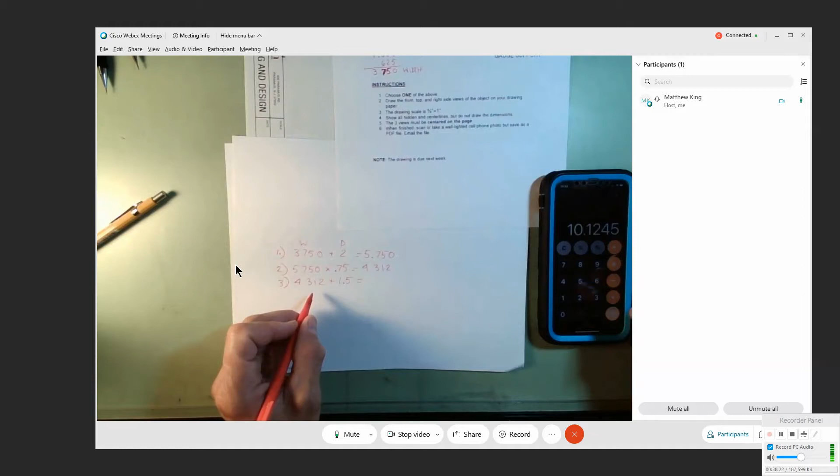4.312 plus 1.5. No way, that's it. 4.312 plus 0.5. Plus 1.5. I'll get this right one this time. Getting tired. 4.312 plus 1.5 equals, yes. Alright. 5.812. Step 4. Now I have my working space, right?

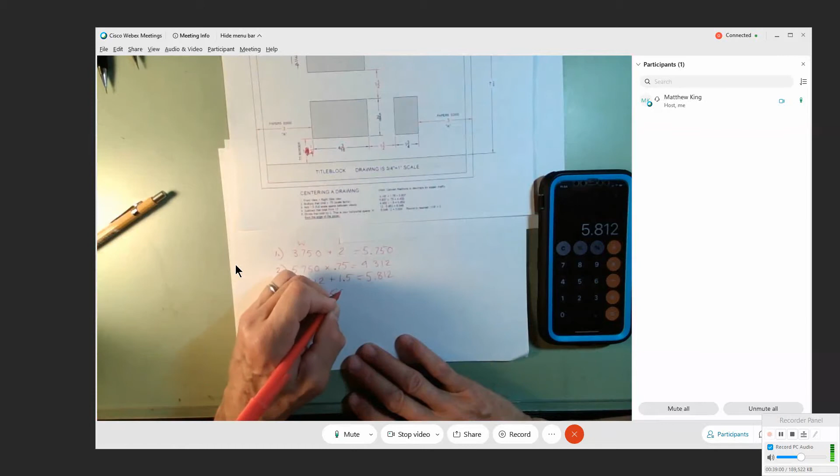The 5.812 represents from here to here. So now I take my 12 and I subtract it from 5.812. So 12 minus 5.812 equals 9.188. Final step, I take 9.188 and I divide that by 2.

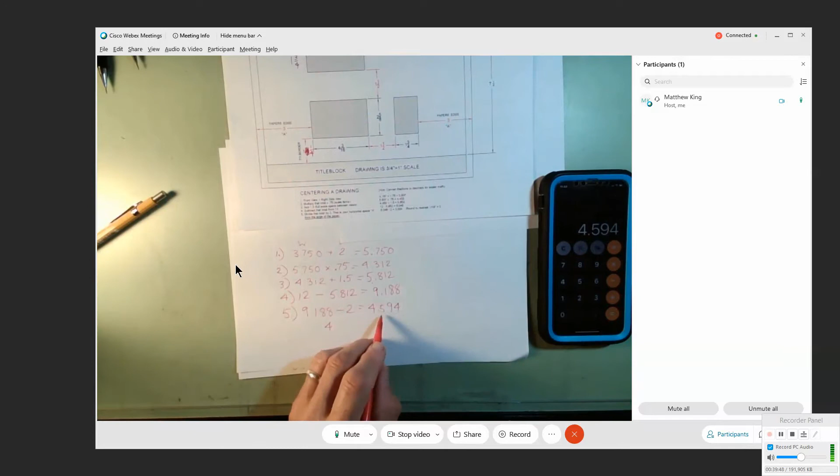And I come out with 9.188 divided by 2 equals 4.594. And that is 4, and we have to figure out what 0.594 is. 0.594 is about here, which is splitting the difference between 9/16 and 5/8. So you could round it down, you could round it up, and that'll be fine. Let's go to 5/8. 4 and 5/8.

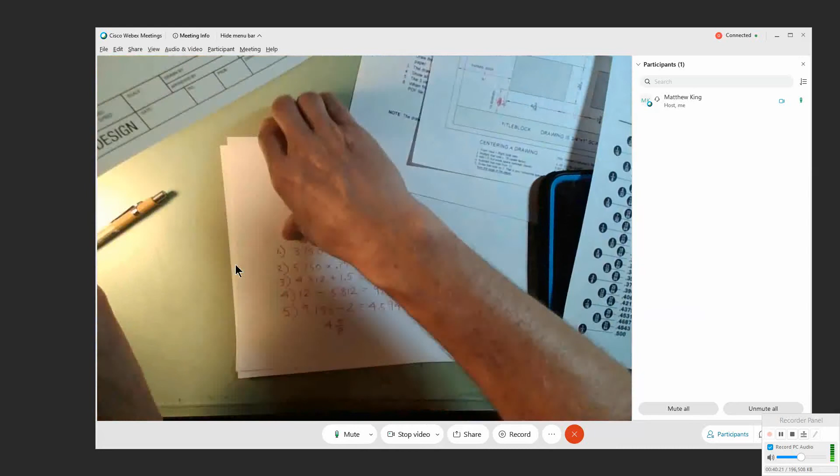Now that seems a little big, so I'm going to double check that. I'm getting tired and making mistakes here. So if I lay that out, right, let's check that. So 4 and 5/8. So what's my scale? At full scale, measuring all the way out, I go 4 and 5/8. There's 4 and 5/8. Then the width of my object is 3 and, this looks like it's going to be wrong here. It went wrong somewhere.

3 3/4 at 3/4 size. So 3 3/4. And then 1 1/2 spacing. Yeah, I made a mistake somewhere. And then the side view would be 2 inches at 3/4. So obviously I'm way off here. So where did I make a mistake? Back to the drawing board.

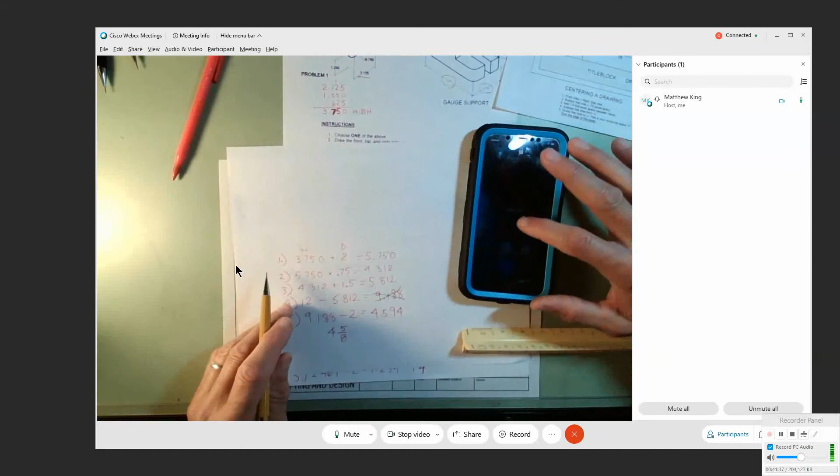So 3 3/4 is the width. The depth is 2. Then we multiplied that by 0.75. And we came out with that. Then I added my full scale inch. Oh, that's where I went wrong there. Then I added my full scale 1 1/2. It took me like 4 times to do that. So let's try that again.

4.312 plus 1.5. 5.8 is correct. Then 5.8 is the total working space, and I say 12 minus 5.812. 6. Now it's wrong. I put 9. 6.188. Now that divided by 2 equals 3.094.

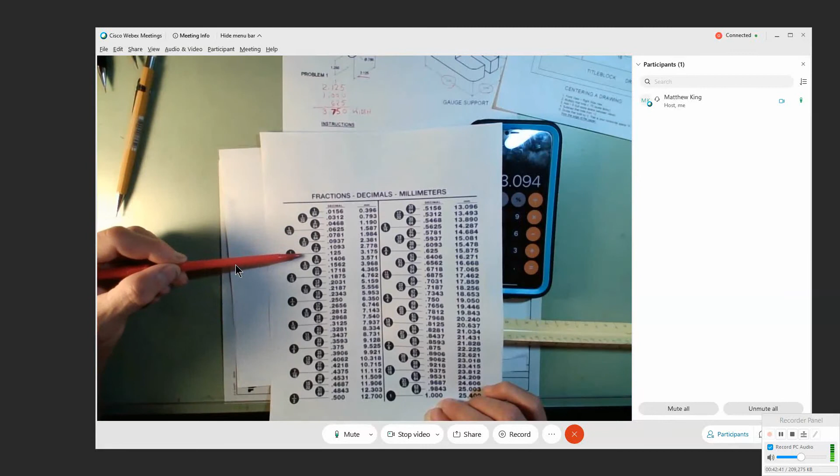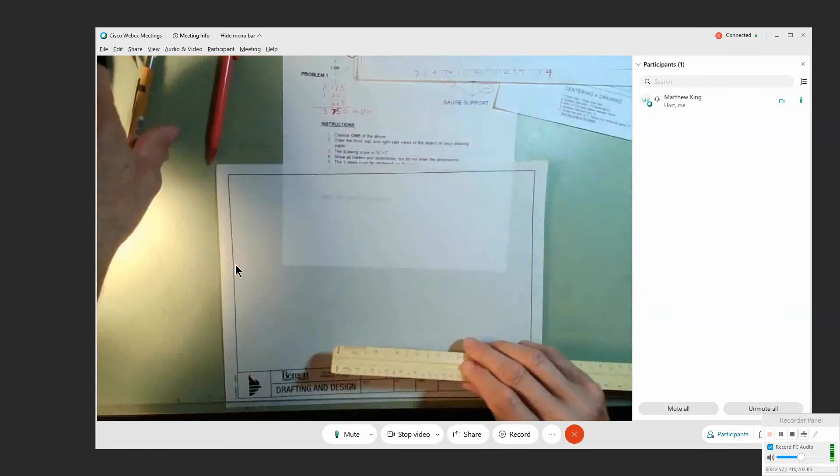And it's 3, and then the 0.094 is going to wind up being 3/32. So we could round that down to a 16th or up to an 8th. I'm going to say we'll round it up to an 8th. That's an easier measure. So 3 and 1/8. Okay, so work through that error. So now let's lay that out again. So 3 and an 8th. Sounds a whole lot more like it.

From the edge of the paper, full scale, 3 and an 8th. Then 3/4 size, the width of my object is 3 3/4. So I go back to 3 3/4. A whole lot better. Then I go 1 1/2 space between views at full scale. And then back to 2 inches for the depth. That's 2. And then if I did this right, I should have about 3 1/8 left over at full scale.

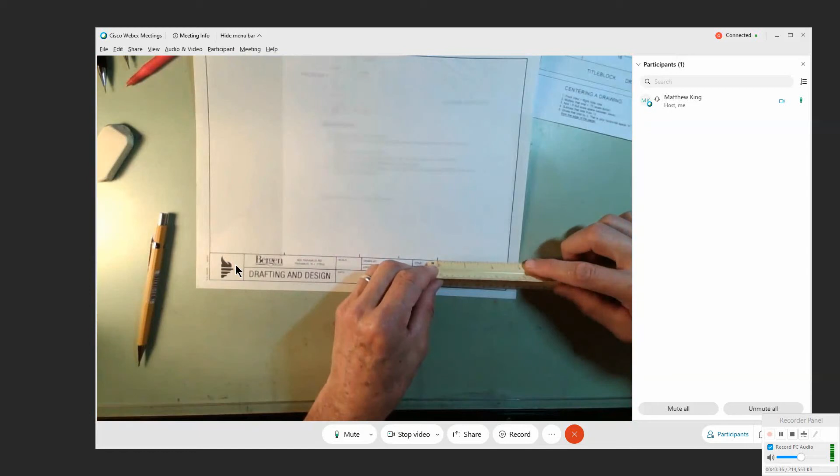Yep. And I rounded it. So my rounding error is about a 1/16 of an inch. I am well fine with that. Okay, so I think I fell victim to fatigue on that. But it's really a straightforward process. Follow the step by step here and try to reason out what you're doing, because you have to do it horizontally, you have to do it vertically.

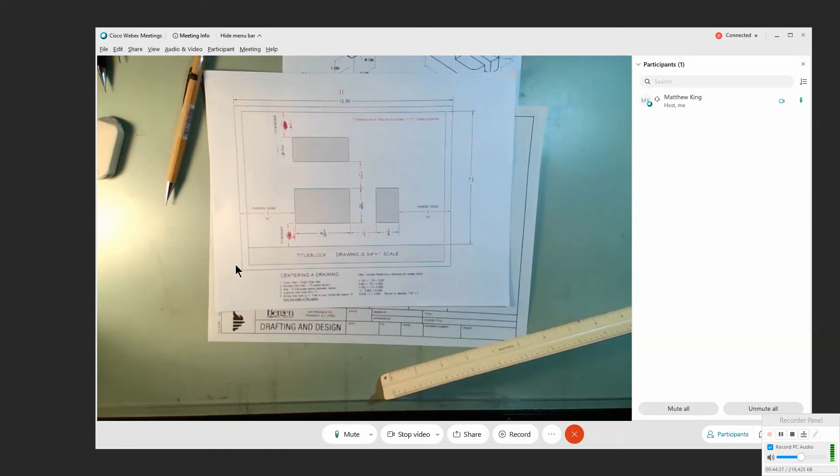And for those of you without the drafting paper, you're going to have 11 inches wide, edge to edge of paper, but up and down, let's take a look at what your actual border is on that makeshift title block, which I have somewhere here, my multiview sheet two. So your up and down is going to be from this border to that border, which, let's measure that, is going to be at full scale 7.5. Okay, so you actually have more vertical space to work with.

So 7.5 is what we're going to write down on here. So 11 inches in width, 7.5, right, in up and down border to border. Okay, top of the title block to the bottom of that border.

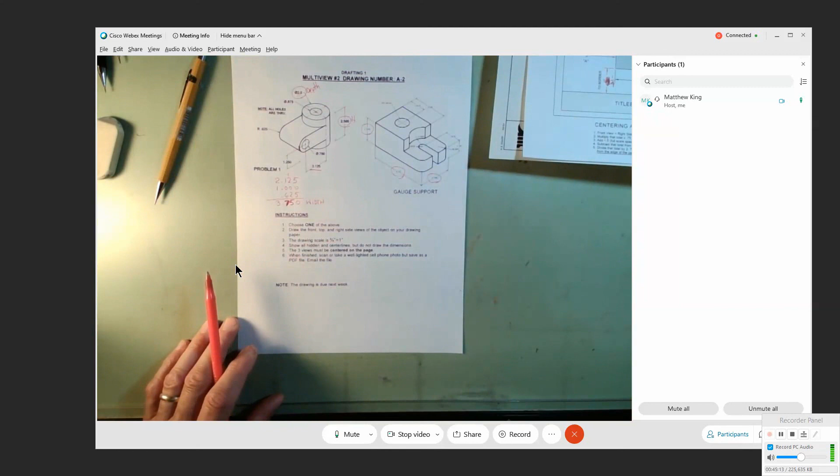All right, I hope you've followed with me and hung in there. What you need to do is lay out these 3 drawings. Remember, start simple. Get your calculations, get the 3 boxes, right? The ledger line, the 3 boxes, and then work it from there. And then lay out your details, okay?